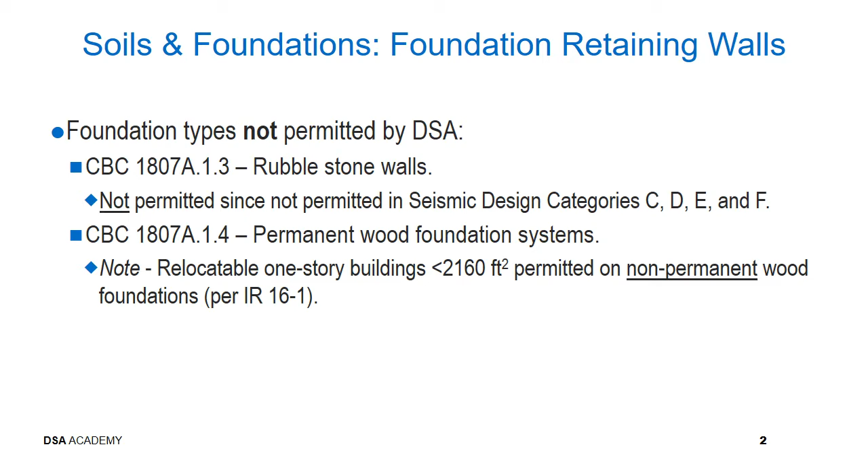Foundation types not permitted by DSA: rubble stone walls per CBC 1807A13 are not permitted because the whole state of California is seismic design category C, D, E, or F, and it's not permitted in these seismic design categories. Permanent wood foundation types are also not permitted per CBC 1807A14. However, relocatable one-story buildings under 2160 square feet are permitted. Anything larger than 2160 square feet needs to be on permanent concrete footings, not wood foundations.

A few more code sections not adopted by DSA when it comes to foundation concrete: DSA requires 3000 psi minimum concrete strength for all structural applications. If you have micropiles, you require 4000 psi minimum strength. If you have precast, pretension driven piles, 5000 psi minimum strength.

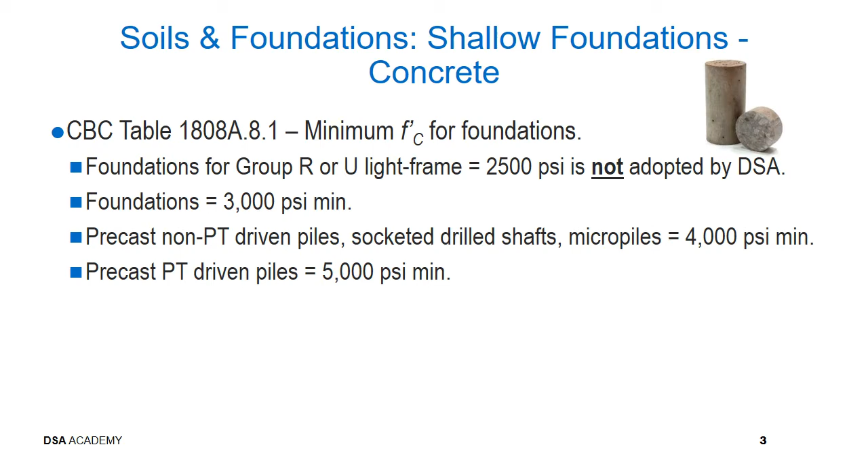A few more code sections to be aware of. CBC section 1808A81 defines concrete slump for deep foundations to be 4-inch minimum, 8-inch maximum. CBC table 1808A82 provides minimum rebar covers, also referred to ACI 318-14 section 774. As you can see from the table, depending on where the foundation is being poured, type of foundation being poured, there's a minimum concrete cover required over rebar.

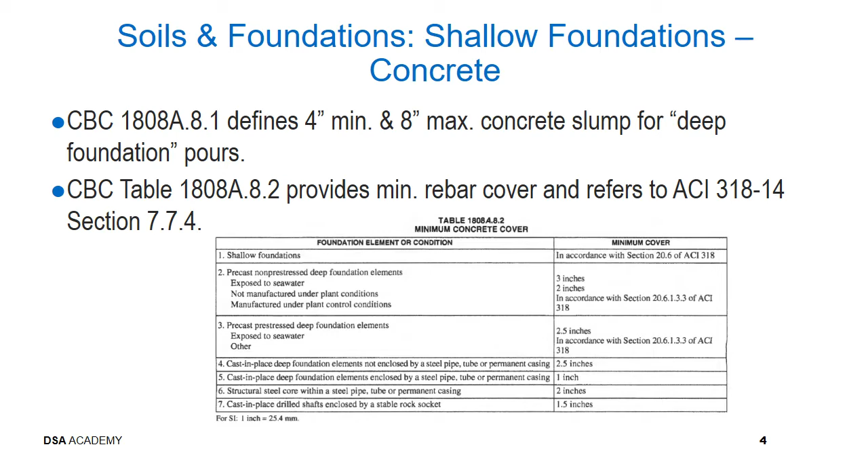A few more concrete sections to be aware of. CBC 1808A83 covers concrete to be free of foreign matter. CBC section 1808A84 covers concrete protection. Concrete needs to be protected from freezing during placement for 5 days, and protected from flowing water after placement.

CBC section 1808A85: concrete foundations against earth are allowed where shown on the approved drawings, and should have a minimum cover of 3 inches.

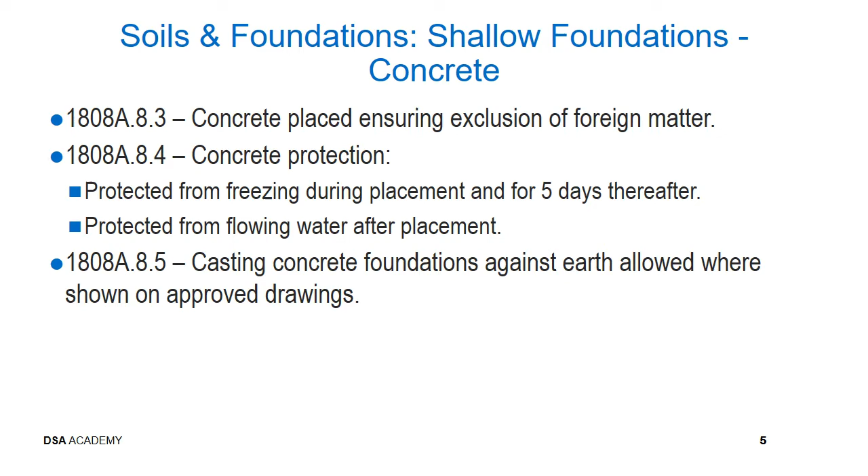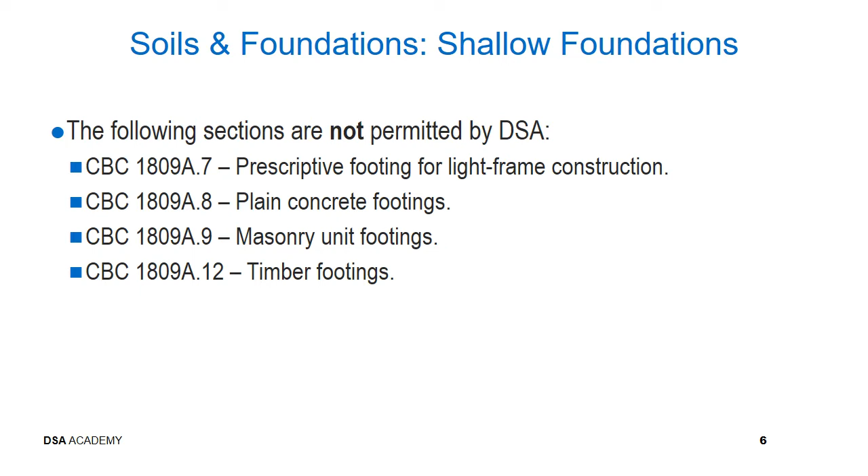Now we'll talk about shallow foundations. Let's start with what is not permitted by DSA. Obviously, prescriptive footings for light frame construction are not adopted or permitted by DSA under code section 1809A7. Any plain concrete footings are not permitted by DSA under code section 1809A8. Masonry unit footings are not permitted by DSA, covered under CBC 1809A9. Any timber footings under code section CBC 1809A12 are not permitted by DSA.

If foundations or footings are poured on a slope, the slope cannot exceed 10%. If it's more than 10%, it needs to be stepped, and any step details should be in the contract plans or approved by DSA. This is covered under code section 1809A.3.

Also, if in a snow country, the footings need to extend below the frost line, and the frost line is usually defined by local building departments and local jurisdictions. This is covered under 1809A.5.

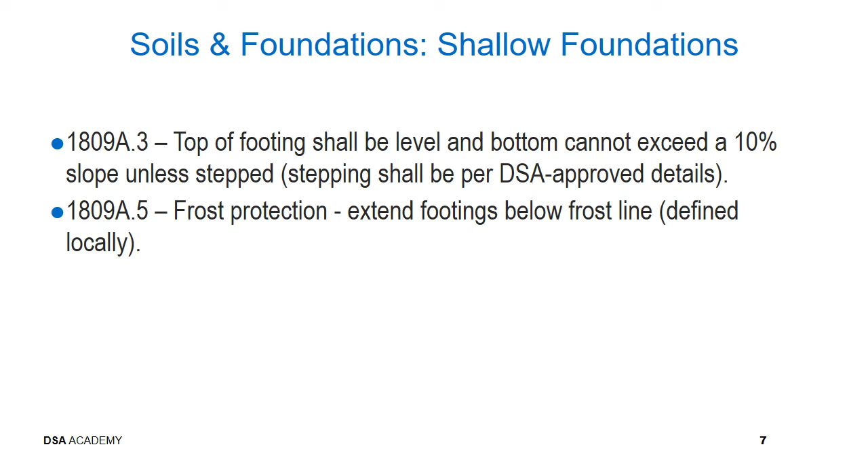If you have a stepped footing, or a contractor is installing a stepped footing, first look for the DSA approved document to see if it has requirements. If none, then the maximum step in a continuous footing needs to be no more than 18 inches high. The maximum slope of a step, if you draw a line as shown on the sketch, shall not exceed 1 to 2 slope. Also look at the geotechnical report - if there's any recommendation for a step, it needs to be complied with.

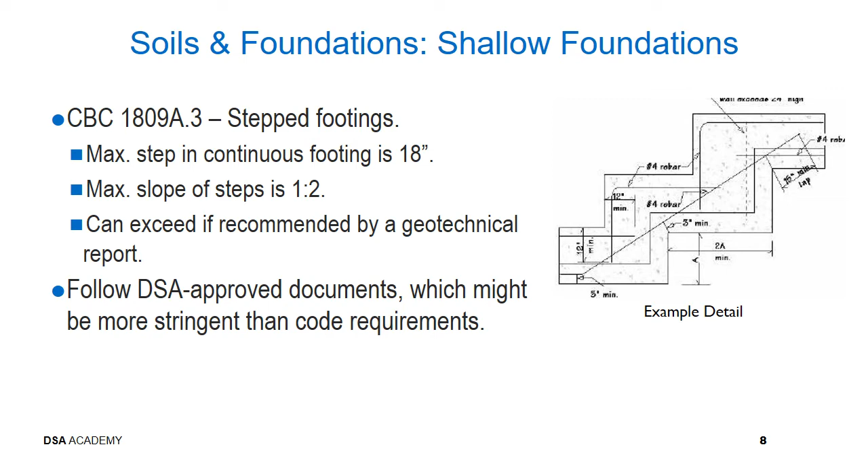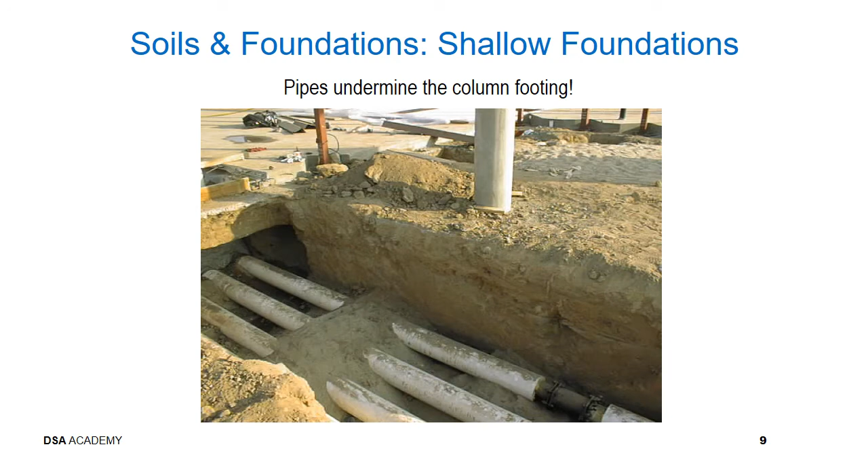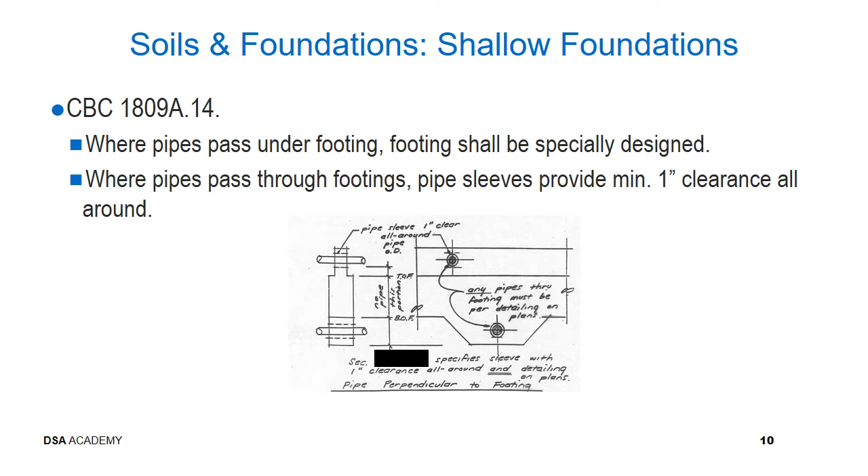Another example is when pipes pass through or under footings. If they pass under the footing, they need to be specifically designed. If they pass through the footing, there should be a minimum 1-inch clearance all around. California Building Code section 1809A.14 covers some of these issues, so be familiar with that when you see pipes going into or across underneath footings.

Another example of a pipe going across a footing. Look in the plans to see if there are any additional clearance requirements, sleeve requirements, or foam requirements. If the pipe is too close to the bottom of the footing, and if details are missing, pick up the phone, talk to the design professional, and look for more direction.

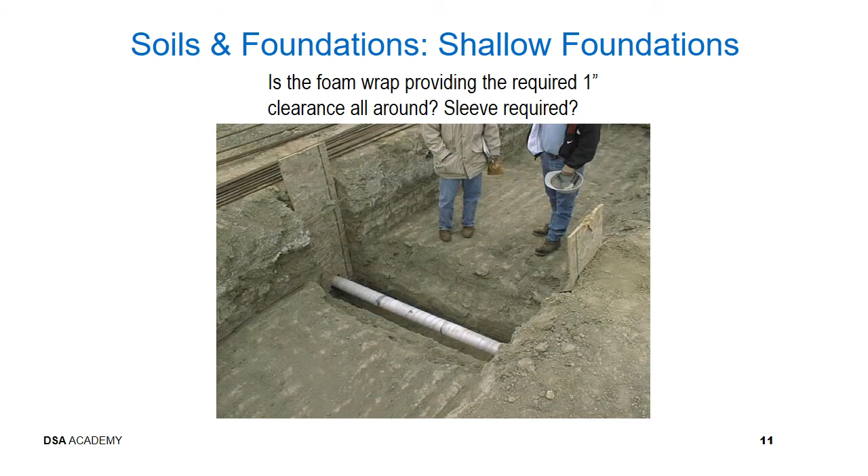Another example: as you can see, one of the pipes is wrapped, the other one is not wrapped yet, but it is required to be wrapped. Look for any other requirements in your plans.

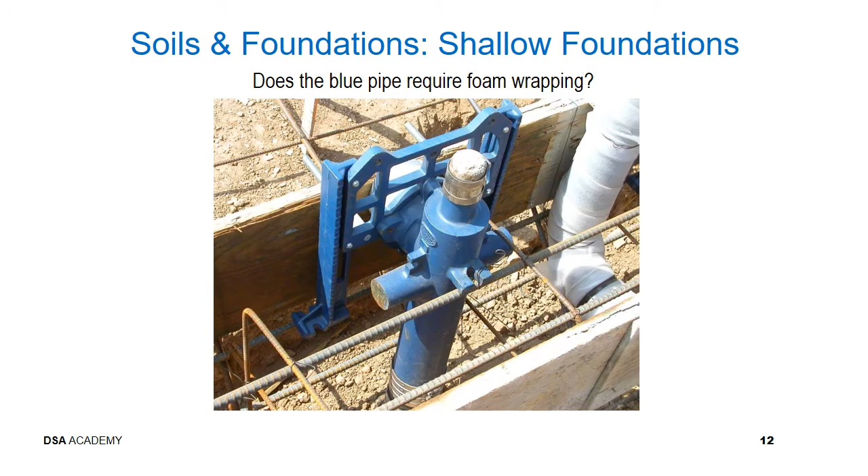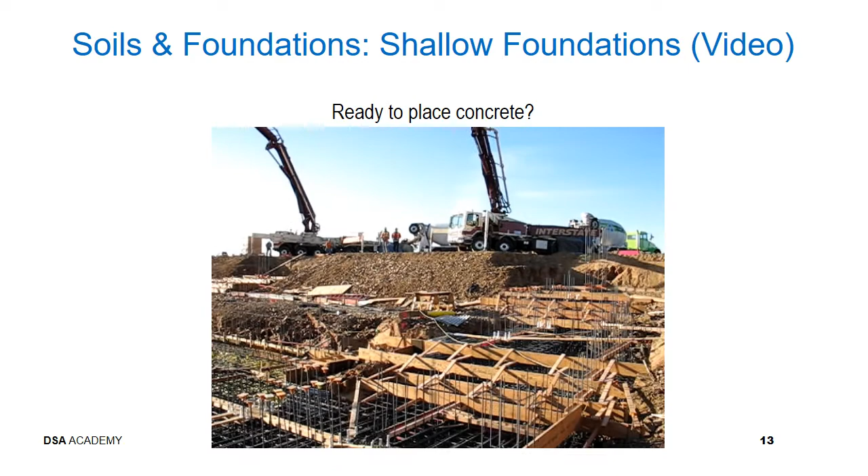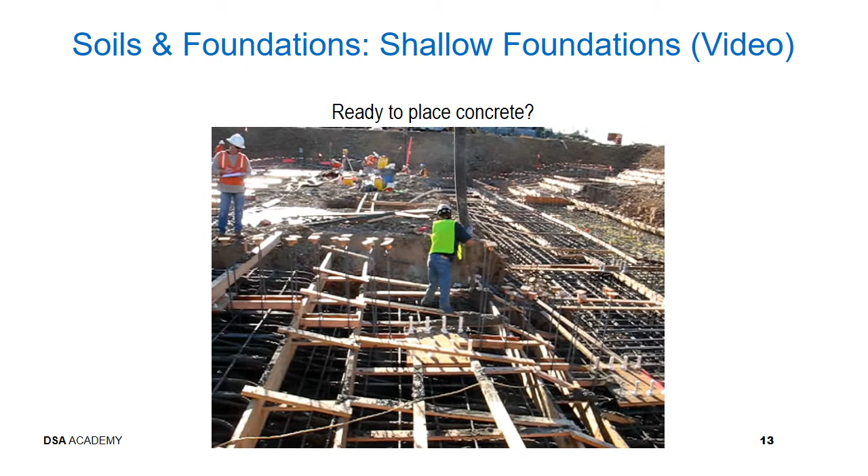Next set of slides are for deep foundations. One code section to be aware of is the mislocation design requirement, code section 1810A.3.1.3, where the designer is required to design the superstructure if any deep foundation is mislocated by more than 3 inches. It's a design requirement, not a field tolerance. If you have anything more than allowed, which is usually 3 inches, you need to get DSA approval on that.

Another code section on helical piles: helical piles are usually used to resist vertical loads only, not horizontal loads. California amendments require 2 load tests for each project, or 2% of production test piles.

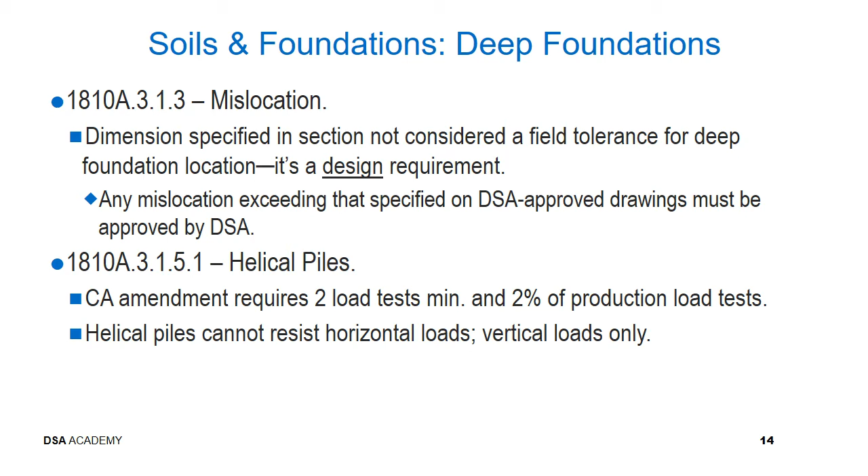A few more code sections that are not adopted or permitted by DSA. Code section 1810A32 has an exception in the IBC, 1810-32212, which permits lower transverse reinforcement for deep foundations - this is not adopted by DSA. So if a contractor tries to use that, be aware of this code section. Obviously, timber piles are not permitted by DSA per code section 1810A324.

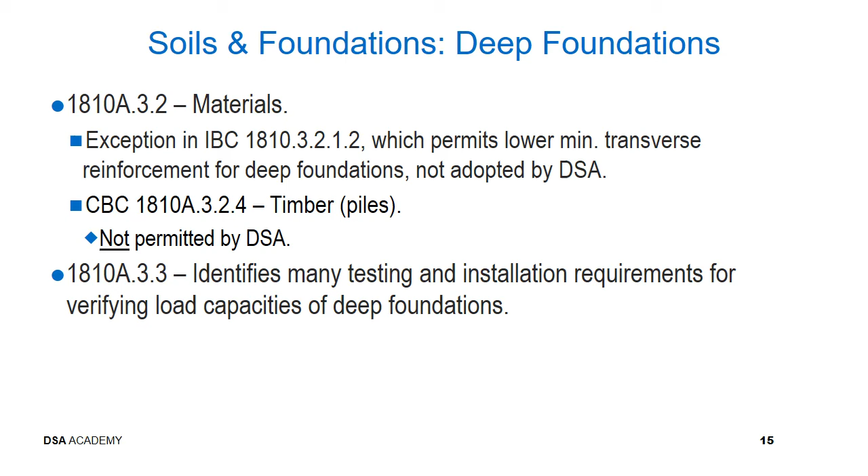Code section 1810A33 identifies many testing and installation requirements to verify load capacity for deep foundations. If you have piles on your project with load test requirements, be familiar with code sections 1810A3312 through 1810A332. There's a section on compression, a section on tension and shear, and test requirements for loading procedures you want to be familiar with.

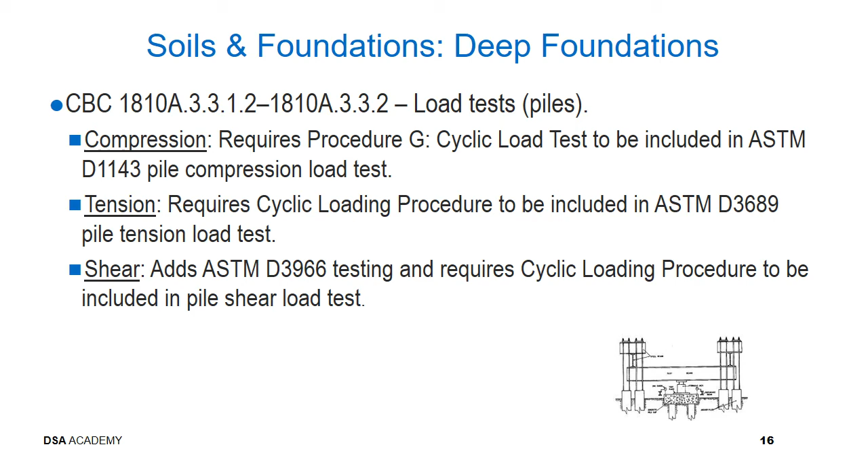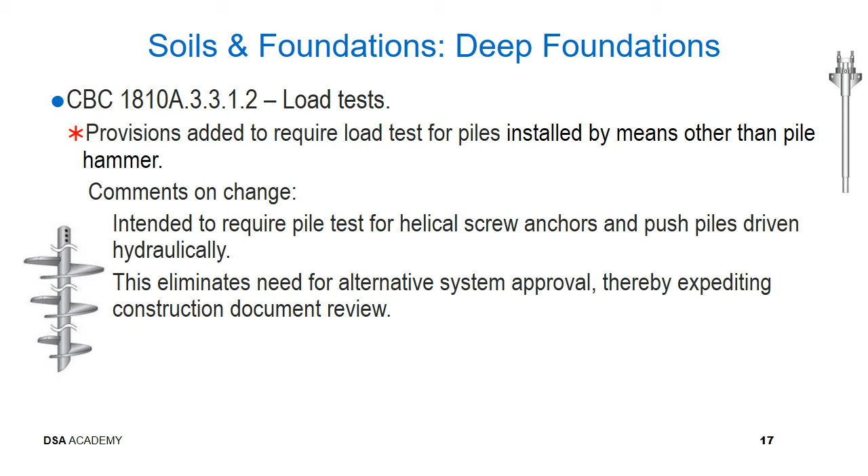If you have piles on your project and piles are going to be installed other than by pile hammer, you want to be familiar with code section 1810A3312. It mostly deals with helical screw anchor piles and push piles driven hydraulically. It eliminates the need for alternative system approval, thereby expediting construction documents review.

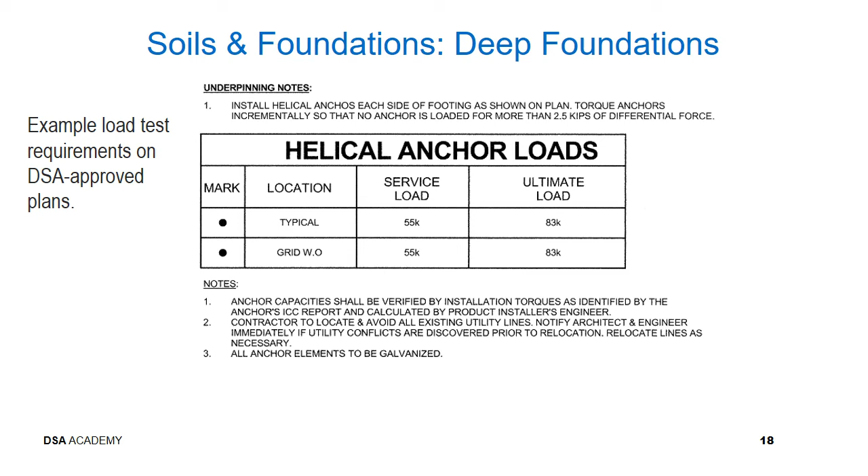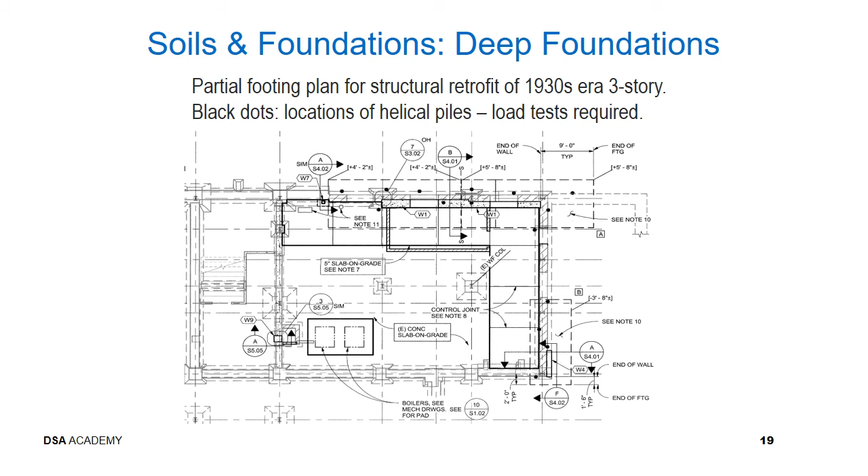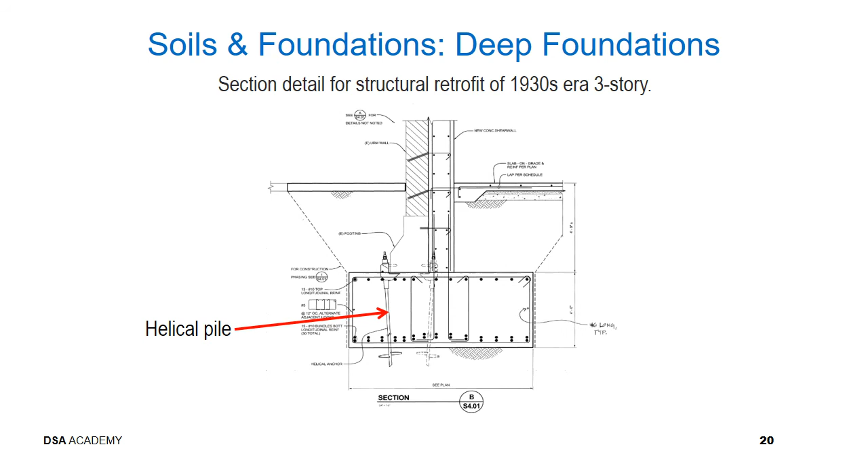Structural steel sheet piling is covered under CBC 1810A3533. You want to be familiar with the amendment added requiring inspection, monitoring, and observation requirements to comply with CBC 1812A6 and 1812A7 for existing buildings when shorings are installed adjacent to them.

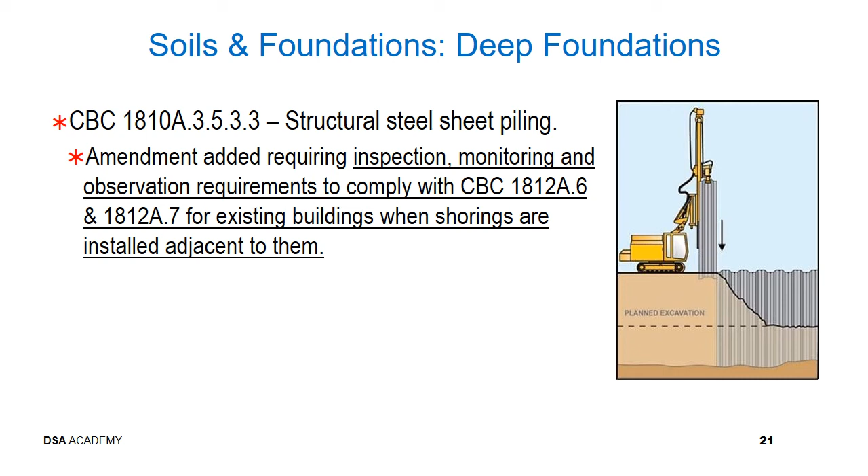Cast-in-place piles, site classes A through D, under California Building Code 1810A39421, clarifies that the reduction of 50% required spiral or transverse reinforcement is limited to the buried portion of the pile. However, any portion of the pile above grade requires 100% of spiral reinforcement as in ACI 318-14 section 18.7.5 for columns.